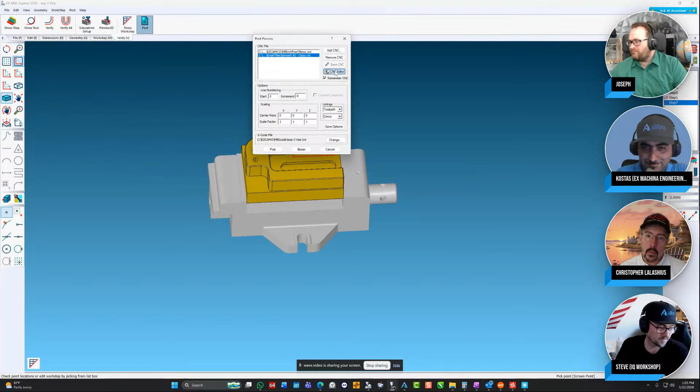So I have a post processor here. It was a Tormach, and I'm gonna just show you the CNC editor. It takes me directly to the Tormach post processor. And in here, we have the program start, and this is legacy format. So we have Visual Basic that's just overpowered this. I mean, you can do just about anything with a post processor, to your heart's content.

Here, we're not seeing a Z issue, but if I go to the tool change format, you can see that we have a positive Z. This M998 is the tool retract. So we're taking that extra 50 thousandths. If I go to the end of the program, that'll be the other location, we're doing the same thing here. Now, had you not known anything about post processors, the AI is there for you, where you can just go in here.

There's an upload button, so we'll upload the post processor. There's our Tormach AI copy. And I'm going to say to it: modify the post where M998 Z, what is it? I got to be exact here: 0.05, should change M998 to Z 0. Now let's see what AI does for us. Doesn't take it long at all.

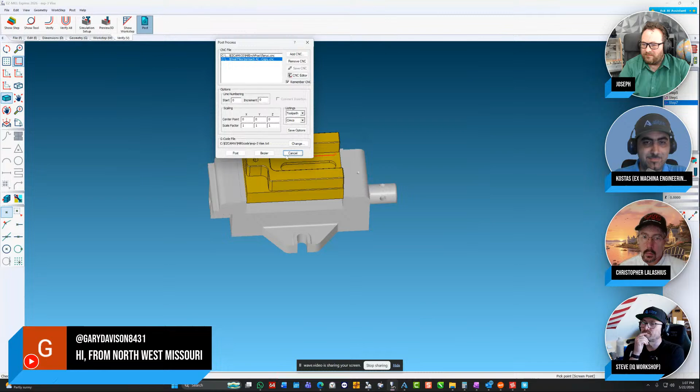But before I do that, I'm going to post the program. Let me just run that through. And post.

Info editor appears. Here's our program start. The M998 is okay, I'm going to go to find. Well, let's change that to... oh, we can go next. All right, so there's our Z 50 thousandths. We'll go next again. Those are through all the tool changes, and then we have our program end.

So now let's run the new post. So AI, you have to save and import to EZ-CAM. Now I'll run that same post processor.

Let's go find. M998. All right, so tool change Z0. So it made the modifications for us.

So anybody can really walk through this and ask AI what they want to change, and it takes care of it in less time than it would have taken me. So I've said this before, but...

Anyone who has, I mean, I've been working in CNC machine shops since like 2012 now, so I've got a bit of experience. Having a post processor that's not exactly correct was a nightmare, because sometimes everything worked in the post processor, but when you used a specific strategy with a specific set of motions and whatnot, it would post it in a non-optimal way.

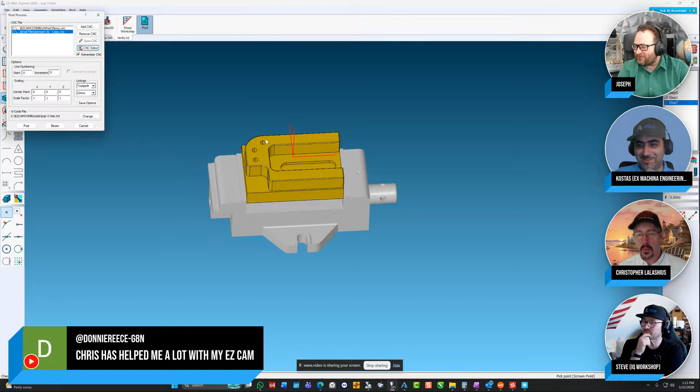Here's one: does EZ-CAM support the Carvera Air, and is Turn needed for the 4th axis, or can Mill Pro do that as well? The 4th axis is in EZ-Mill, which supports full 4 axis, so you can do wrapping. As the rotary table is indexing or rotating, we can move in X and Y. We even have it now where you can also work X, Y, and Z while you rotate the part, for 3D surfaces. I've got an example of that.

Maybe if I step into it real quick here. Let's see, Mill, open.

4th axis - so here's an interesting example. You put this on a 4th axis, and while this is spinning, it's going to be moving in X, Y, and Z.

Might take... okay, here we go. Let's simulate that.

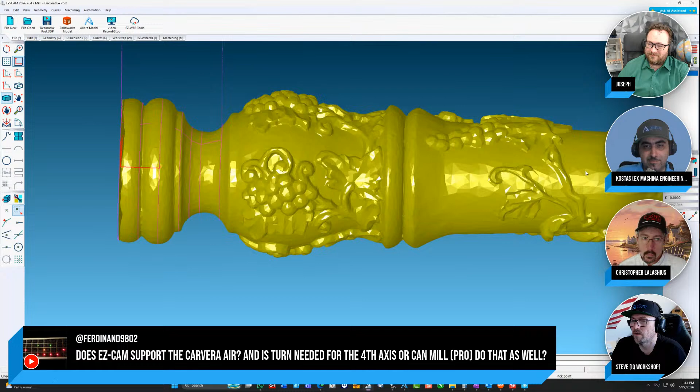I was trying to make a larger step over so we didn't have to wait through it so much. Let's see - curve step.

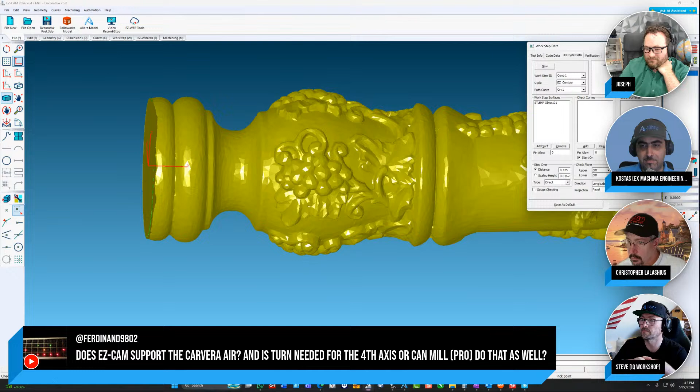Yeah, I keep getting an error, as it always happens with live, because nothing works right, of course. Doesn't it? Happens to me all the time.

Right, yeah. Why don't I come back to this? While you guys are talking about an Alibre question, I'll iron that out.

We'll nail that, absolutely. Something we've talked about with Alibre in the past is STEP and SAT files, and I don't know if I gave that the depth I should have. I think it's important to unpack why these are different formats and what a big difference it makes. When you have a model in your computer, no matter what parametric platform you're using, if you convert to STEP, there is a substantial change.

STEP says: I want to store all of the geometry or the shape of the file. Your computer, on the other hand - your Alibre or whatever platform you're using - actually represents these surfaces using something called NURBS, or analytical surfaces. NURBS surfaces, imagine, are point splines that you can make. In fact, I'll pull this up on my computer.

NURBS is a really fun word to say - kind of a funny word. But if we make a spline like this, I have all of these control points that determine the shape of the spline. Imagine those in 3 dimensions, and that is how organic geometry is represented. So your computer has a bunch of these in the background that you don't see, representing these surfaces.

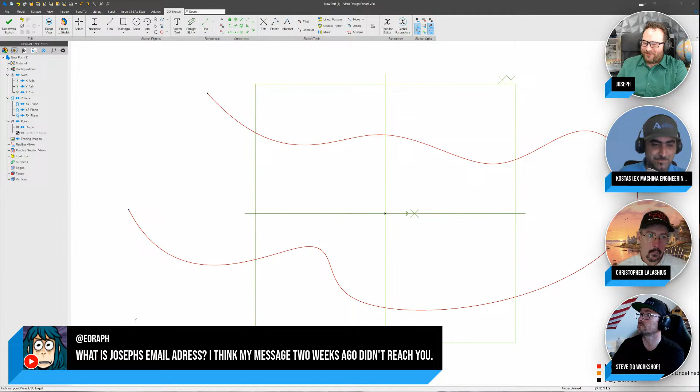Okay, can I just add a couple of things? First of all, I want to highlight this because it's a really quick answer. The answer is yes, it does - I've used it. The question was does EZ-CAM have adaptive roughing and finishing, and adaptive roughing, because that's only used for roughing. But yeah, it does have adaptive roughing. I just wanted to add to that.

So NURBS - it's not a slur for somebody who's just started playing the video game you love, right? It actually is initials for non-uniform rational B-splines. I think I got it.

Yep, and they were developed by Renault in France, right? And they're called Bezier curves because the actual mathematician that defined them mathematically for the first time was called, his last name was Bezier - I think it was Pierre Bezier or something. But the really funny thing is, Renault invented this thing, and the first car they designed using NURBS was the Renault 19. Now go on Google and find a picture of that car - it's a square box. So I don't know why they went into all that trouble. A square box with invented NURB fillets... curves. But yes, it does have a couple of fillets. That's very true, especially the 16 valve one, which is quite an exciting car to drive, but it's still a square box. So they went to all that trouble to design a slightly less square box. There you go, fun fact for you.

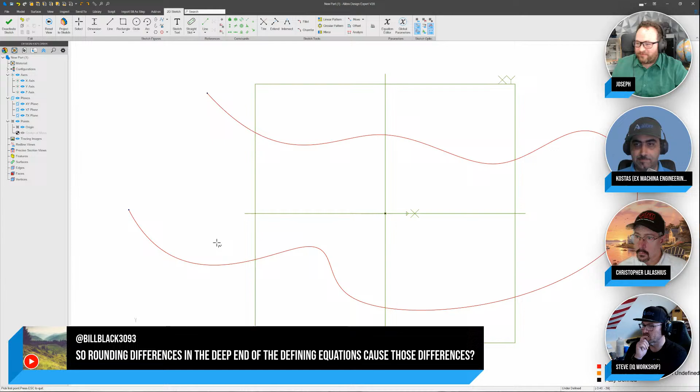That is one thing, yes absolutely. When you're dealing with NURBS, different kernels are going to define splines differently, so you can have the same geometry represented with very different looking splines depending on how the given computational kernel processes that. What these kernels do - we think of them as geometry kernels, but their geometry is almost secondary when you think they are defining topology, maintaining consistency across different nodes, constraint graphs, geometric computations - all of it happens before the geometry, so it's almost secondary. There's a lot that can cause these errors. Another thing is when you go into surfacing, you have a patchwork of different individual faces being knitted together, so small rounding differences compound across these different relationships sometimes. That's a big factor as well. Hopefully that's kind of an answer, and a lot of it depends on the specific case and situation.

Yep, and look, NURBS is a really weird thing in mathematics. If you go into the math definition of it, it's a function - for every point, if I remember correctly, the tangent to the curve at every point is defined by three control points: the one you're closest to, the previous one, and the next one. There's a mathematical definition there, so it is a bit weird. And I imagine that different geometric kernels have different commands and entire algorithms and strategies to decipher that and actually design the curve, so it's also a porting issue. When you want to take one set of commands that maybe ACIS uses and port it over to do the same thing with a different command set that Parasolid uses, that's another issue for translation problems.

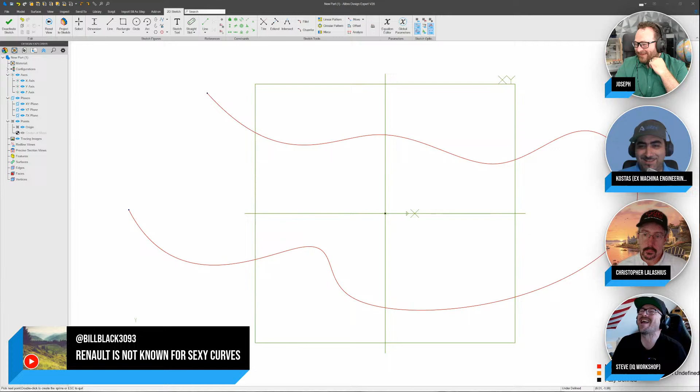Love it, yep, I like that too. I think this one might be for you, Costas. Yeah, well, they're not known for sexy curves - they're known for being sexy around the curves because, come on, they're great cars, really fun cars to drive. And the good thing with Renaults when you drive them is you don't have to look at them on the outside, which is a major plus.

And we have another question. Oh, math is fun, got to throw that one in. It is, math is fun. Yep.

All right, this one is kind of after my own heart. Does EZ-CAM run AI locally or through an EZ-CAM server? It goes through the server. Perfect.

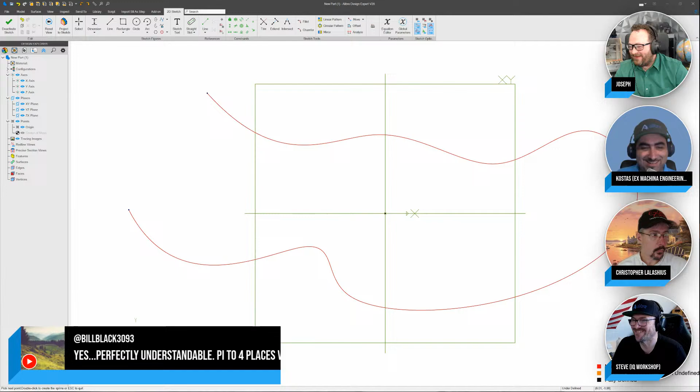Oh, we got a reply from Costas again. Yeah, he keeps going, but he's correct about that, right? My absolute favorite Renault was the Clio, the first Clio 16 valve, and the Clio Williams - they were amazing cars to drive, like the benchmark, but they were ugly. Come on, let's be honest, ugly cars but great to drive. The question is though, Costas, do they have the Renaults that we know in the US? I don't think they do - this might just be a European thing. I don't think Renault is sold in the US, and I don't think they're sold at all these days, right? I'm pretty sure Citroen is out of the market as well - they had the large XMs with the hydropneumatic suspension system.

But yeah, that's a great one - if you ever get the chance to drive one of these things from the 80s, nothing, not even a Rolls Royce or a Bentley from 2026, rides like that car from the 80s. So if you get a chance to drive them, do so. But I don't think they're in the market in the US anymore - it's a European thing. Was that the Citroen CX? No, the XM, the larger one. The CX and XM had the same suspension system, and the last car to have that was the Citroen Xantia 2. But the XM, with its large wheelbase, was like a steamroller.

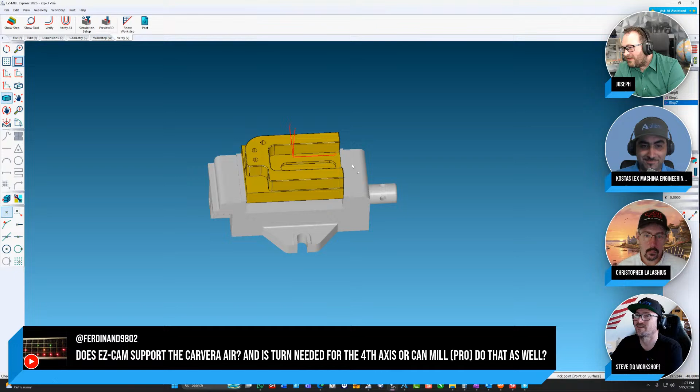Now I'll go to your screen, Chris. Sure. I saw back to that adaptive clearing question - it absolutely does do adaptive clearing. I don't know if you can show us maybe how to invoke adaptive clearing, what the benefits are, and why someone would care about that method.

All right, let me - finally found that question, I got a good example for us here. Okay, let's deactivate these and start fresh. So we're going to pick this face - this is what we're going to use for high-speed machining, the adaptive machining.

I'll use a quarter-inch tool for the step over, so we modify the feed rates, and also our return passes stay down at the bottom of the part so they're not rapiding - you're not getting all these rapid moves coming over to the next move. We just skim the bottom enough so you're not going to have chips go underneath the end mill.

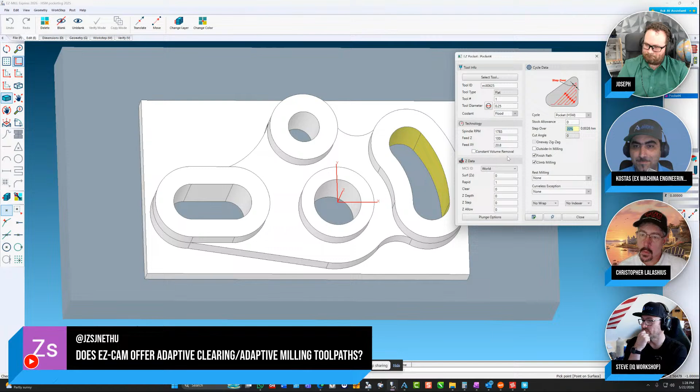Exactly. Verify that. Now, if you noticed, I only clicked one face, and EZ-CAM automatically knew where the bosses were, so it adjusted for you. We start our toolpath outside of the stock.

Let's bring that up again. So EZ-CAM will start its machining from the outside, work its way in, using arc segments to come into the corners. I'm going to use an oversized tool - let's make this 625. Verify again. Okay, so we're starting in, we're stopping where the tool can't fit.

Okay, so what we'll do with that is we'll go back in and make another operation, change our tool, change the size of our cutter, go into rest milling - that was pocket 4. You can adjust the step over here, you can adjust your plunge options - everything you could do in the first operation, you can do in the second. That's something we've just added, I think it's new in version 2026. So we'll verify.

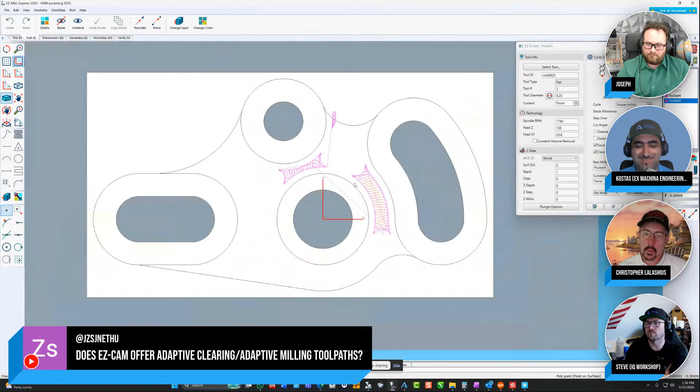The EZ-CAM gives us a nice lead starting out where the material had been removed. Combine it all together.

And preview. Okay, so the change in color is a change in tool number. And this is showing us where the other tool left off, and we did our remachining with high-speed machining.

Can I just add that the reason you want to rough with what's become known in the industry as adaptive milling is you get a very stable chip load. Every time the end mill takes a cut, it cuts the exact same thing. That keeps the vibration steady and reduces resonance, where you might get a vibration that resonates with your entire system and flexes the end mill, creating lines on the part.

And most importantly, when your end mill resonates, it moves a little bit more than it normally does, so it wears out a lot quicker. Surface finish isn't that important when you're roughing because you'll finish it anyway, but end mill lifetime is definitely important. That's the expensive part in all of this process - the end mill. If you can make it last twice as long, which is not uncommon for adaptive roughing compared to roughing with straight lines, that's a big win.

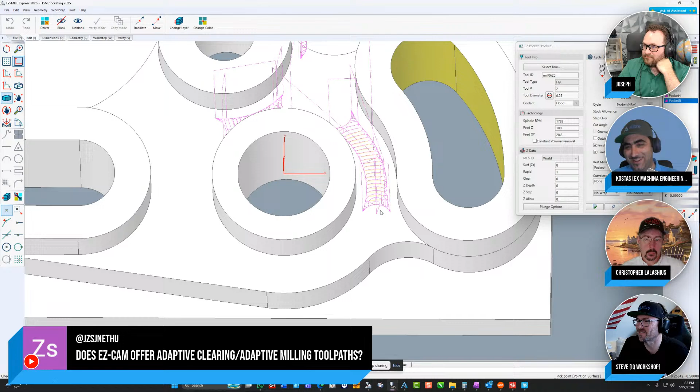You can see here - I just want to point out, when I was saying it would start off the rough material so you're not going to damage your cutter, it actually has a lead in, and this is on the roughing. The outside tool path - that was on the rest machining, right? Yes, and here we're starting on the outside and working our way inward.

So we're not damaging the cutter at all, and that's true with our 3D roughing too. It's just impressive where it realizes material's been removed when it's going down for the next cut. That's important, man, because you can definitely helix into a part and start clearing it out - it's a valid strategy, especially for an enclosed pocket, that's the only way to do it. But it takes a bit more out of your end mill, and if you don't have to do it, why do it? And if you need to spend 15 minutes fumbling with options and settings just to get it to start in the correct spot, it becomes quite annoying quite quickly.

What I'm going to do - I just want to post this and show you that we're adjusting the feed rates as well.

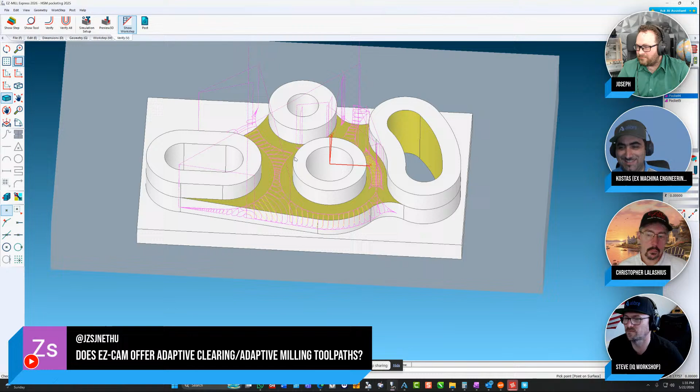Can I say something else about that? That's a feature SolidCAM heavily markets, and charges quite a bit of money for as well. I think the variable feed rate in the final CNC program - they charge more for that feature than the entire EZ-CAM license, just for that one option. And you have EZ-CAM doing it out of the box, which is nice.

And it's not just the time saved - for somebody who hasn't used adaptive roughing strategies, it's a revelation when you do. You're used to getting like 10 or 12 parts out of an end mill, and suddenly you're getting 30 parts out of an end mill. That's real money right there.

So adaptive roughing or adaptive tool paths are essentially more gentle on the tool. From what you're saying, is there any other advantage to it?

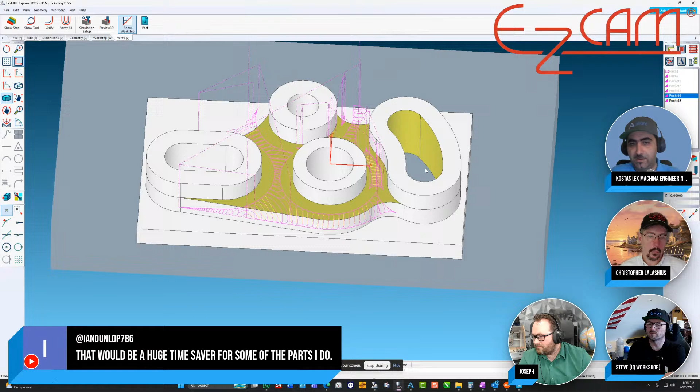That's real money, guys. That is real money right there. Carbide has spiked in price the last couple of months, so saving tool life is important. It's even more important now. Yeah, you reduce a lot of heat. Exactly, an awful lot of heat.

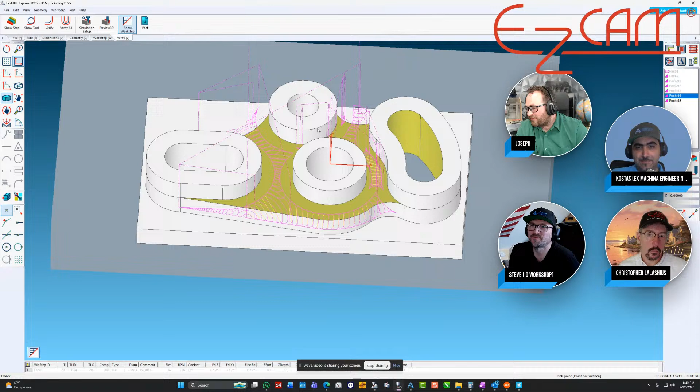And also another one for you, Chris: Can I start with EZ-MILL Express and upgrade to EZ-MILL later if I need more advanced features?

Absolutely, absolutely. So you want to be within your 1 year support and maintenance on that, because if you let it lapse, then to upgrade to the next level you just have to keep in mind that you have to purchase your maintenance to keep current. And so you pay the difference within the year. If you skip a couple years, the maintenance goes up a couple hundred dollars. It's not like you have to buy the whole seat, the whole maintenance from the first year, second year, and so on. That seems to be a trend going on out there. It gets pretty expensive to keep up.

Oh man, I have a pet peeve about that, right? Yeah Steve, he's heard this before. It's like Kostas, you keep saying the same story. First time I heard about that, I was working at a machine shop, and I was talking to the rep for - I'm not going to say the name of the CAM system - and I'm like, ha, nice joke, cool, but really, what's the price? And he was like, no man, that's the quote. I'm like, okay, but I don't want to buy the system again, I just want maintenance for this year. And he goes, yeah, but you need to buy the 4 years that you missed. I'm like, oh no, man, you just lost.

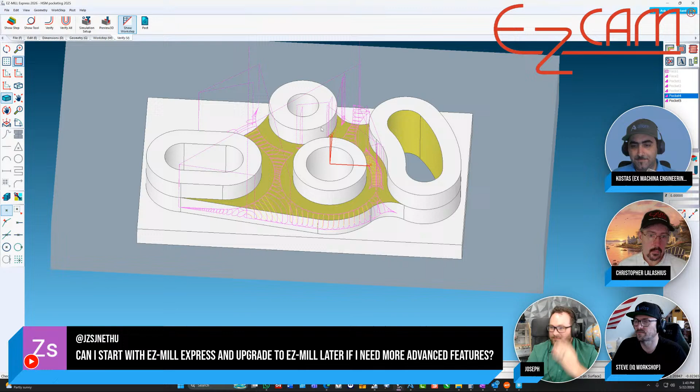I'm going to have a little laugh because I came across this question: can you do a chamfer along a 3D line? I immediately thought, I've already got this perfect spline I just sketched for a last question. So I switched to my screen and hurried to make something with a 3D profile. I said, let's do a chamfer along a 3D path - then I bet they're asking Chris that question and not me. I was wondering about that.

But yeah, we do have an example of that - let me call that up. So in Alibre, you absolutely can do a chamfer along a 3D line. I'm so glad to be as helpful as I was. By the way guys, this is a very famous part - for those who don't know what it is, it's a very famous part. This is a 3D area here where it's coming down.

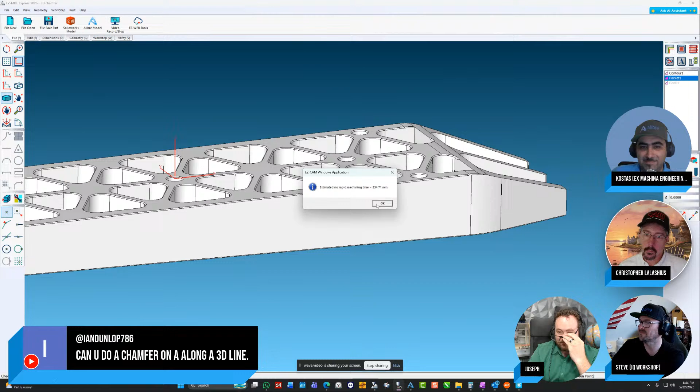Let's deactivate that. I'll put these into motion, get a preview. So I'm just working with this half. Now we're going to go into contour. Set up my tool - I do have the ability to bring in a tool library. Right now I have a blank one; I was bringing in some other tools from another vendor, I think Kennametal's one of them. So you can import tools. I have a flat end mill - let's put in 45 degrees. Now I select my surfaces, 3D section, and verify. Preview. There you go.

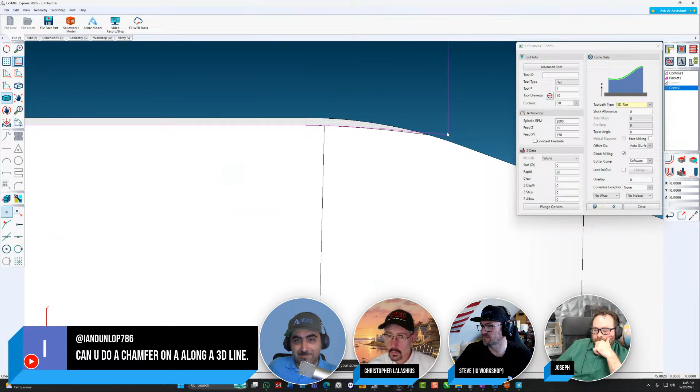So yeah, we can put that around. Let's go with 3D slot here - I think is what I need. We'll do a side view. You can see it's coming into a 3D cut right there.

Now Chris, this is also great for deburring parts - I just wanted to say, not just chamfers, but also for deburring parts on the machine. Super useful, that's a good point. What kind of machines do you need for chamfers on 3D paths? Can you do it with something 3-axis, 4-axis, 5-axis? It's something - as you know, an EZ-Trak, an E-mill has a powered Z. If you have a powered Z, you can do it. If you're standing there with a quill, of course, 2-axis, you're not going to be able to do that. But anything with a powered Z can take care of that for you.

What's the best tooling for that? Would it be more of a ball end, or some people use? You can use a ball end, you can use a bull, some people use a spot drill. That's very common - you just grab a carbide spot drill, what have you, and run it over it, especially for deburring, I did that. Here I have a 45-degree chamfer tool that I use, but you can always switch that over to a spot drill - change this to a 90-degree tip angle. Wow, lots of good options. Yeah, oh, the diameter is wrong. Yeah, okay. Let's see.

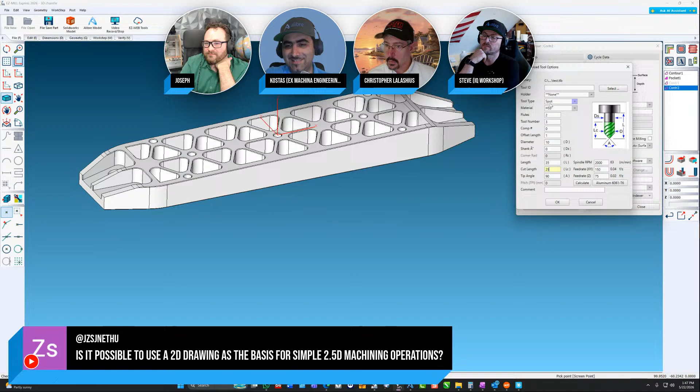Spot drill. Diameter. There we go.

I like this question. Is it possible to use a 2D drawing as the basis for a simple 2.5 machining operation? 2D geometry only, like a DXF, I'm guessing. Yeah, a lot of the guys with plasma cutters and lasers, that's a real go-to. But you want to work with a solid model in most cases.

By Alibre, exactly. Alibre Atom, guys. It's a... but I don't know. Do you have a, Chris? Do you get a discount for Alibre Atom when you buy EZ-CAM? How does that work, do you bundle it?

We're a bit different, you guys bundle yours together, and what we do is Alibre, when you buy, there's a machining option for Alibre, and you get EZ-CAM and Alibre Atom with it. But seriously, Alibre Atom is like a $200 purchase, and they often do discounts. It's perfect for a machine shop because most of the time, if you have a 3-axis or 4-axis mill, that mill cannot cut geometry that Alibre Atom cannot generate. So it's a perfect match, and you only pay like $200 for it, no need to pay $10,000 for SolidWorks.

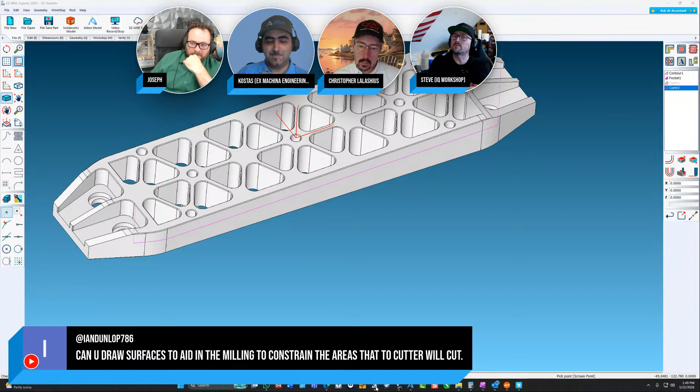Within EZ-MILL Pro, you can create surfaces, so you could extend, we could even cap. Let me show you. Let's see, nice part, cancel.

What is that, like a printing roller? Yeah, it's like a rolling pin, sort of. Let's see, cool, it'll patent taco shells. Don't go there, Steve. I was going to say, isn't it Taco Tuesday? It's always Taco Friday over here, Chris.

So in some cases you want to extend the surface. You might want some over-travel where the ball end mill isn't rolling over the edge but flowing through it. We use a curve for that. We'd just snap from one end to the other, maybe use edit and translate X negative, say, 1 inch.

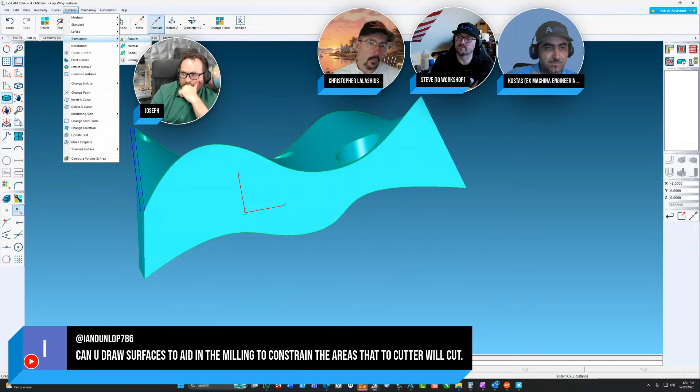Copy mode, select our curve, then go into surfaces and create a ruled surface, select your boundaries. So you can do quick things like that in EZ-CAM where you don't have to take it over to Alibre and modify the model or come up with some kind of extension. Even with holes, a lot of times people want to cap them just to smooth out the tool flow, and we can do that by going in and creating a face curve.

Surfaces, standard, from plane, arc, circular curve. I'm going to discriminate, when I click I only want to click on a curve. There you go. You can see that we've patched it and it looks like a perfect match. So yeah, you can do things like that. You can even use the geometry on the surface edges for chamfering.

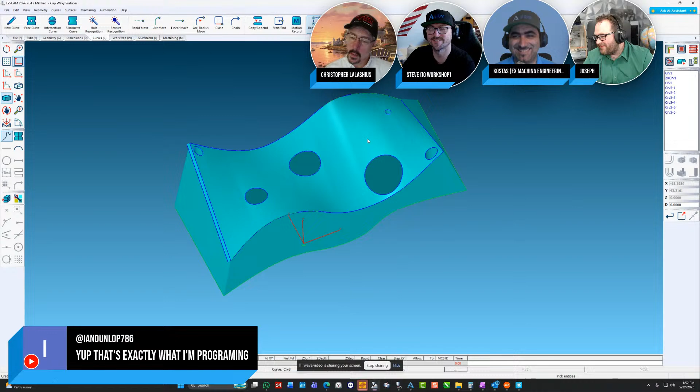So we've got a reply. Yep, that's exactly what I'm programming. So Chris, it looks like you hit the nail on the head there. Hey, once in a while we'll find bread. I think Bill Black noticed our top comment. Oh man, Steve, you shouldn't have. Come on, I'm getting hungry already.

So there's a really good question here, let me just throw this up on screen. Does the software support creating and using custom cutting tools? Yes, we do.

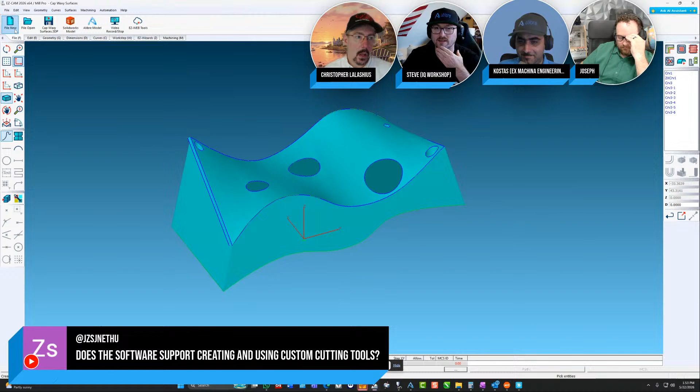Don't know how long it's going to take me to do this, I'll try to move through it pretty quick. Let's just say, let's make a contour. Bear with me, let's see, do I have one open? I do have one open. Okay, so Mill Pro now requires the Mill and the Mill Pro in order to make custom tools.

Now what I need to do is open EZ-CAM's library. Let's go on the C drive, EZ-CAM W, and we are working in 33. Switch over to all files. Tool holder, let's go with, I think that's inch, so we'll go with tool holder inch. You can see all the different, oh those are tool holders, I want custom tools, sorry.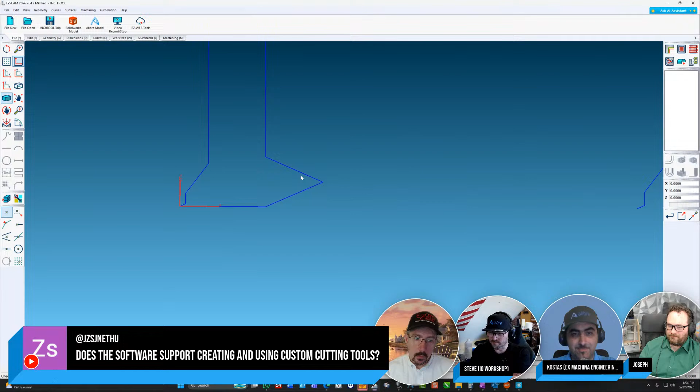There we go, here's one of our thread mills, single point thread mill. Here we have our center drill. So let's go down to the end of the pile, let's go with new curve. Before I do, I'm going to set up my grid spacing, let's do something like 1/8 of an inch.

Make a new curve, curve 14. Wait a minute, well, I want to rename that. We'll get back to that. Let's see, so linear grid. We'll just do something like that. And I'm not on zero, I want to move that up. Move from here, there. Okay, so that was curve 14.

There's a status bar down at the bottom, so that's the active curve. So I'm going to save my library.

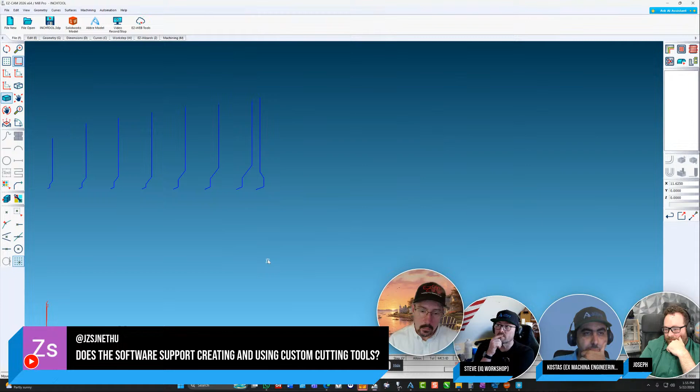Can you show us the status bar again? I'm just moving us out of the way here. Oh sure, okay, so down at the very bottom we're on layer 1. So if we're working with different Alibre models, for example, you might want to click on layer 1 and change that over to layer 2 and then bring in your Alibre file. So now you are stacking them up and you can work with layers. We have a layer manager that allows you to hide, delete, or make copies of them. It's all tucked away up here. I know I'm going into a different subject here, but man, it's just insane. You can hide them, you can show them, delete them, create other layers, add the models to the layers.

So, yeah, good organization. So now let's go into this one. I've got to go to my tool library. Library.

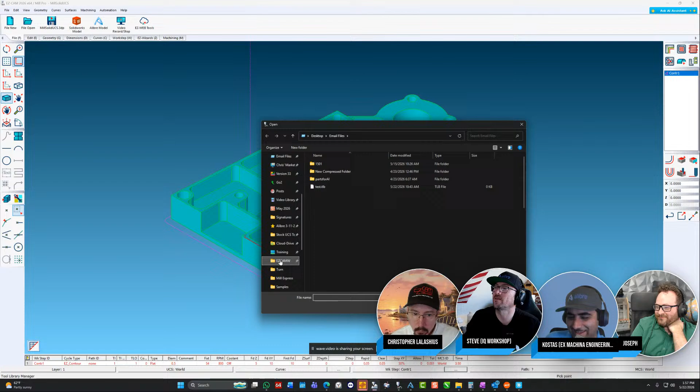All right, I'm going to create a new tool. That was CRV 14, I think. God, I wish I renamed it. I would have been able to. Let me just pop that back open. Yeah, CRV 14, okay, that's the key to it. You draw a curve representing your tool shape, you've got to make sure you name it accordingly. So let's go with a flat end mill, readable. That's where it's getting the custom form. Angle zero. Close, save.

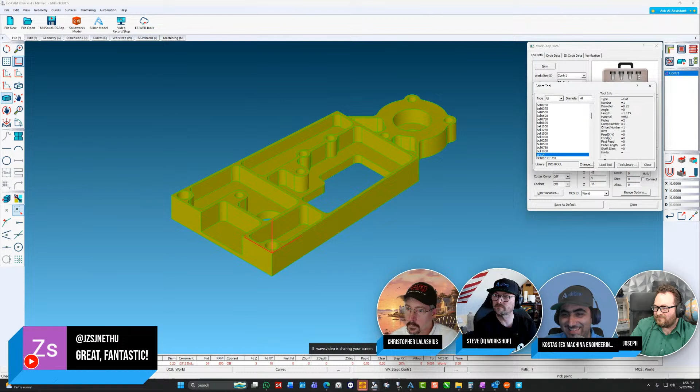Go in here. Background, select. Whoop. There you go, I hope it's not case sensitive. Let's see, simulation. Slow the simulation down. Turn off holders, the tool holder is huge. Yeah, the tool holder is huge, but the tool seems to work. Yeah.

I'm in, this is metric. I was wondering if that... well, that's not the case. Escape. Let's see, overall corner radius. Tool, all right, switch over to you.

I'll get this, once in a while you end up running into something. I'm rushing around, there's something silly I'm doing here.

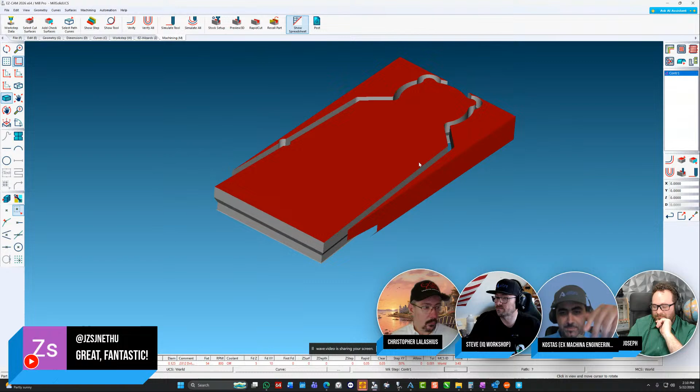When I had a job in a CNC machine shop, we used form tools for aluminum - it was a specific profile of a part with two ball bearings, basically a sliding door would ride on these things. You had to do a very specific profile and then put the ball bearings in, and it was just a form tool in a single pass. So whenever you have a profile that is repeating along a path and you have a large production quantity, you do a form tool.

No reason in playing with - it's funny, I just want to see what a Z helical will do with this type of tool. We've added the Z helical so it spirals down like a corkscrew. We've added that to the Mill Express. Let's just take a look at that toolpath. Yeah, that's cool, so let's make it a little steeper.

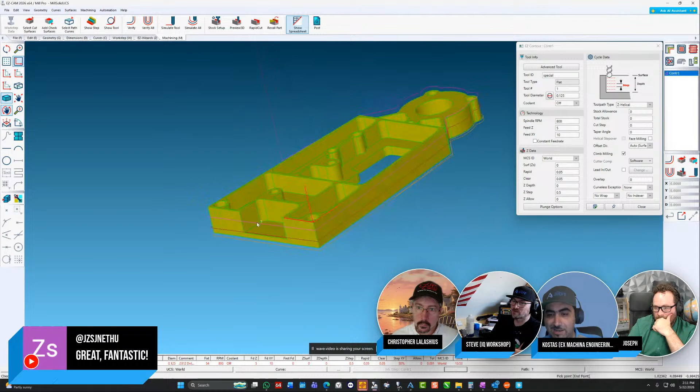Oh okay, I want to comment on that because I saw it when I was using EZ-CAM, and I really love that, I want to add something after you're done, Chris. Oh yeah, let's just see what that looks like. Isn't that awesome? Isn't that awesome? Let's just change that back.

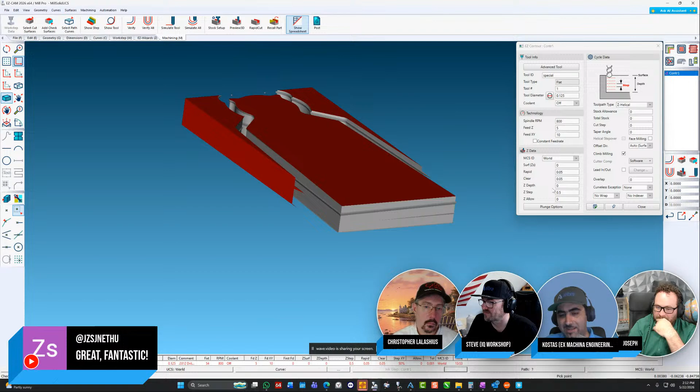I used to do the math in Excel and create that program manually for cutting key slots in very large shafts - like 120 mil, 5-inch, 6-inch, 8-inch shafts that you'd put large gears on, with a very large key seat. I used to do the math and do that, ramping down - I'd get an end mill slightly wider than half the key slot width, and it would cut the key seat a lot faster than just plunging in and trying to hog out the material.

But what I wanted to say is, when you're doing a helical entry for an adaptive, so you have an enclosed pocket like we were discussing earlier, you do need a helical entry for the adaptive roughing. EZ-CAM allows you to choose the taper angle of that helix as you go in, right? Which is a lot more important than people think. Do I remember that correctly, Chris? So I'm gonna put that into play here for you, yeah.

So the key to high-speed machining is you really want to go as deep as you can possibly go, and then step over. Maybe step over at 20%.

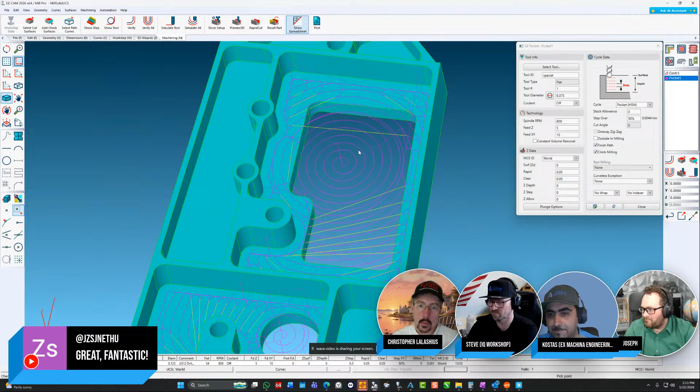So to do that, you can see here we're plunging straight down and getting to the bottom. What we do is add some plunge options. If your plunge options don't work, let's say you're using a helix and it's too large, or it's starting in a corner, EZ CAM will adjust and give you a zigzag down to depth. So you get some kind of plunge into the material rather than going straight down. EZ CAM adjusts for that automatically.

Before, it used to be plunge parameters aren't possible and you're done. You'd have to make the adjustments yourself, use a curve, redefine where your end mill is going to start. So EZ CAM automatically gives you that zigzag where you just can't fit a helix in there any longer.

That's cool, man, isn't it? That is so cool. You get to helix into your pocket with parameters that you select, and then you continue on with your adaptive. Exactly, yeah, that's cool.

I'm seeing noise, Joseph, your mic is pretty hot. Oh, is it? Let's see. What kind of noise is it? White noise, something like that. Yep, a booming noise, basically it was like the mic, it's noise floor. Is that any better? Yes, it's better, not gone completely, but it is better. Oh darn it, yeah, I think my computer is really doing something here.

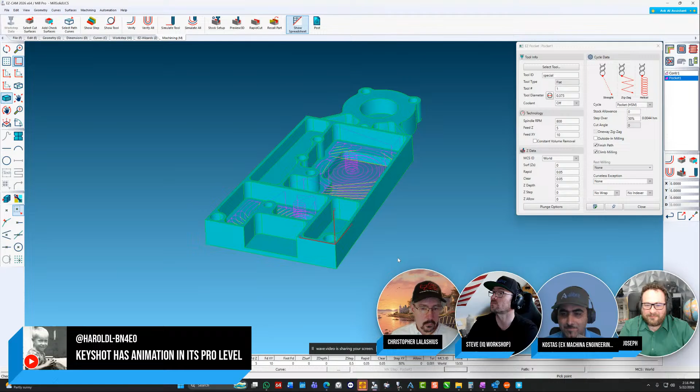I don't know if this is along the lines of what you might be looking for, but I did make my own animation inside of Alibre. You can crop out the UI and have somewhat of a real looking animation, dynamic springs and all that. I've got a video on how to do this, but essentially you can either make an assembly, turn it one frame at a time and take a screenshot, which is what I did here, or you can write a Python script, and I think there's probably one I can make available that would automate an animation like this as well.

So there are some things you can do inside of Alibre, and then there's free software as well. Blender is known for its animation and things like that. So there are options, but I think Harold really nailed it with the most straightforward answer. And a shout out to our forum legend Harold, who we love having join us all the time as well.

Can I just say, Glenn Lipman, man after my own heart, I also do mechatronic design. Basically, that's my niche as well. So yeah, that's what I wanted to say.

Maybe you have a robotic simulation program like I've been using for years, Coppelia Robotics, and what I've been doing there in the simulation, it's not photorealistic, but you can get a lot of data out of your entire system, and you can add the Alibre model as an STL. Then the rest of your robot or machine can be just a free body diagram, blocks interacting. But you can see in your simulation screen the STL from Alibre, and you can get amazing telemetry from the software. So if photorealistic is not a very hard spec, that's another way to do it.

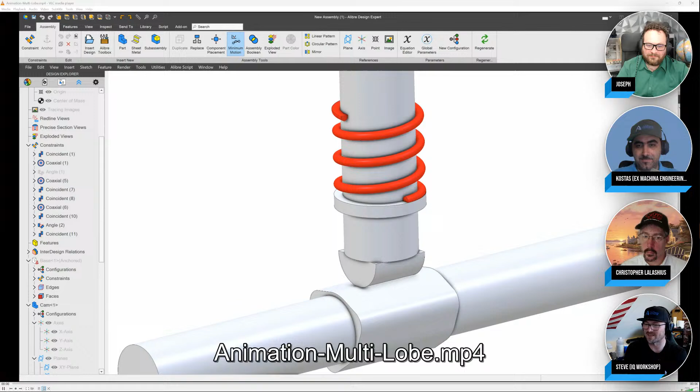However, Blender is pretty up there right now, and there's nothing missing out of it. People have actually made entire animated movies with Blender. It even has a video editor built in. Not a lot of people know that Blender was used for previs for one of the Spider-Man movies, I think Spider-Man 2. It's so powerful—fluid simulation, loads of things in there.

All right, so I'm seeing a few other interesting comments. I think there's one for Chris, actually one for you, Steve: chips and queso first, particularly for our British friends, since there's such a difference between temperature profiles of Mexican and British foods.

So Brits, we do like our spice, right? You've heard of the East India Company. So yeah, British cuisine, curry on everything. I think we invented fusion cuisine, because other than a roast dinner, I don't think there's much that's our own. Well, this company invented a lot more, like stock trading and a few other unsavory practices. But we can take our spice in the UK.

No one ever says, 'Gee, this meat pie is spicy.' Is that true, Steve? Are they pretty bland, or do you get a spicy one? Well, it depends on who made it. I do have family in London, and I try to visit when I can, and I can tell you, you can get any type of food you want, perfectly made—Greek cuisine, Persian, Indian. You can get anything. Let's be honest, you've seen Sweeney Todd, right? It's got cats in it, Steve. Just watch what's in your meat pie.

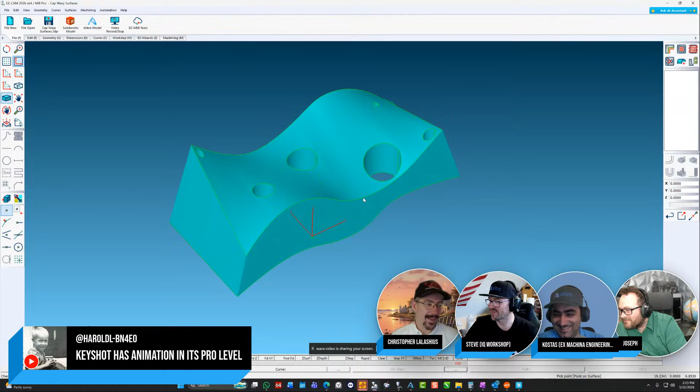So on a surface with holes like the one shown previously, is there any way to avoid holes during machining? As in other CAM software, Bobcad has this feature. Oh excellent, glad you asked—let me just set this up here.

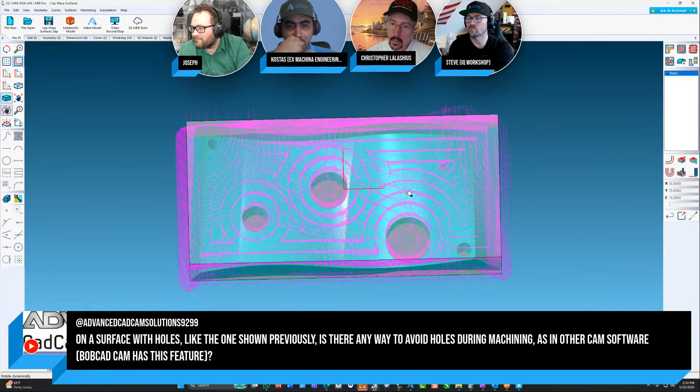We'll put our coordinate system in the center with some stock. If I go in and add—let's go with roughing and pocketing, flat end mill. Let's make it 6, see if it'll drop in the holes. I don't know the diameter right off the top of my head. Ignore region size—maybe I should get a dimension on that, but let's say we ignore regions up to 1 inch. And verify. Down in the lower left, we're showing our calculations going through. There it is—see, we're skipping over all the holes in that size. So let's change that.

Should start falling into... see, you can see here it's dropping down. But you can ignore regions. So like if you had a slot, you didn't want the tool dropping into a slot, what you'll do is define the length of the slot if it's longer than the width, or whatever. So you want to give it the largest dimension to skip the feature. Perfect.

I saw that as well. But yeah, Fusion licensing, Fusion licensing. It was really horrible when they started changing the model, and they seemingly randomly started putting tools behind a second paywall. I mean, just make the subscription more expensive and be done with it. Why do you need to do that? It was a bad move.

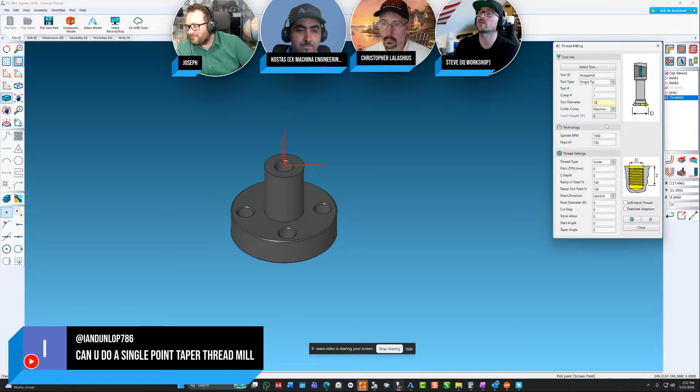Console. All right, looks like we're back. Recovered, we're back, almost there in my console. If you can hear us guys, let us know. Back. There we go, okay, let's take that one from the beginning, guys.

Yeah, okay, sorry, so we'll go into a thread mill. This is 36 in diameter, that's the major diameter, this is going to be an outside thread. Put a pitch, let's go with 2.5 for the pitch. The depth, let's go with, say, 50. Feed, you have a machine direction, you can feed from the bottom up or from the top down. Root diameter, we'll say 33 millimeters. Let's see what that gives us.

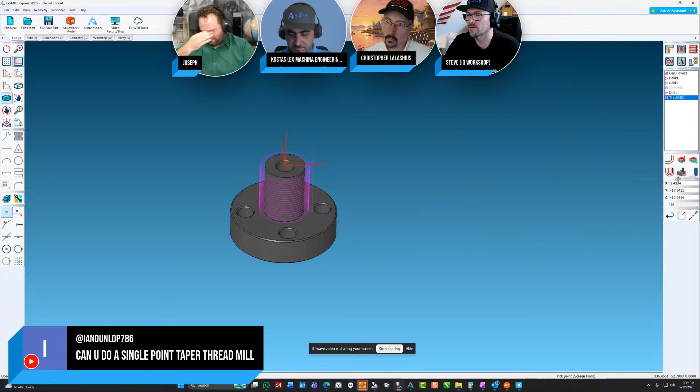No machining path specified, so you go in here, you select your cut surface. It's highlighted. There's our thread. Let's see what that looks like in real life here. Let's verify all.

Need my library, I have to go to... And sometimes if you don't install the software as administrator, you're going to run into an issue where it won't find the library. So you might want to reinstall the software as administrator, give the user administrative rights. You can take the rights away from the user after you've installed the software. Let's go ahead.

12. Thread mill. Pitch, 5. 33, depth. Preview. Wants to use my custom form tool.

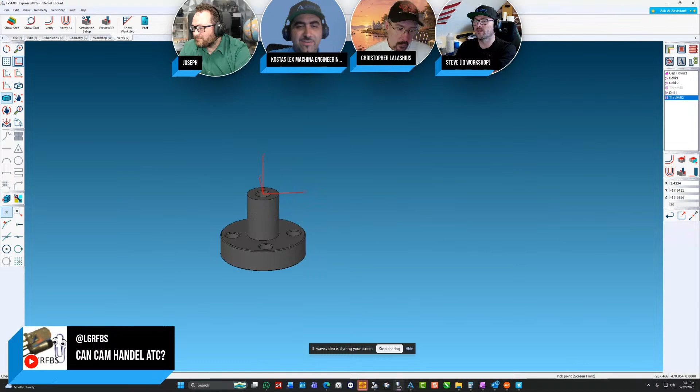Okay, so without a tool changer, typically what happens is the machine comes to a stop when it sees the difference in tool numbers. With an automatic tool changer, it just sees the tool number and does the tool change for you. One step further, if your machine supports it, you can have a next tool call, so not only does it go ahead, raise up, index, give you the tool, it'll sit there for the next - EZCAM will give it the prompt to do the next tool change without the M6. The M6 does the tool change. So if I'm on tool 1, it'll take the tool, then before it goes down, there's a next tool call, just T2. It'll automatically index the tool into the carousel, ready for when the tool has to return.

So yeah, fully supported. Just changing the tool number is all it takes. The next tool has to be added into the post. So if you're listening and you don't have the next tool set up, you can ask AI. AI takes care of that.

JSZ asks if it's in metric or in inches. From what I saw, both. Is that correct, Chris? Yeah, I've been working in both units.

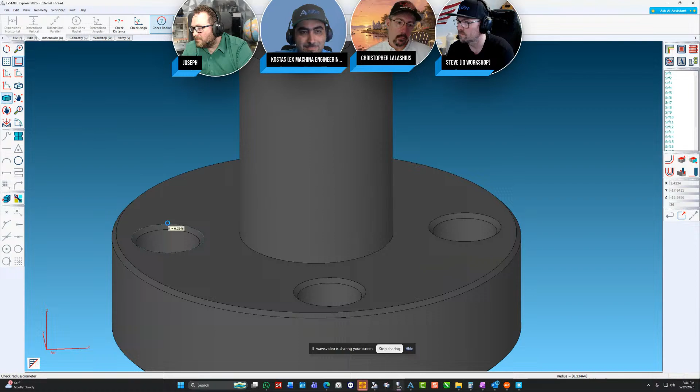Now my model, if I was to measure a hole, 0.3346. So now it's in inches. Simple as that. Matter of fact, if you asked AI that same exact question, how do I switch from inch to metric, metric to inch, it'll give you the whole explanation. It'll all be there for you.

That's so cool. Just on the AI piece, as a new user, if I came into the application and brought my model in, and there's a particular operation I want to do, can the AI educate me on how to do that properly? You know, I've been dying and chomping at the bit to show you this, guys.

I'm going to bring it in. I'm glad I asked. That's why the newbie is on the panel, right, to ask the silly questions. Yeah, the newbie. Steve is not a newbie, guys, but yeah, let's go. Let me just shut this down. It takes 3 minutes to do it, but it's worth showing you, and we'll just find some content, some topics to talk about while we're waiting for it to process. But let's go in here.

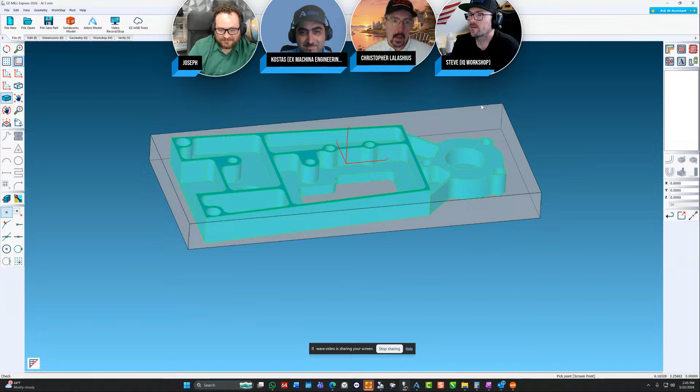AI. So yeah, you know nothing about programming in EZCAM, and you want EZCAM to make this model for you, give you all the toolpaths. You can adjust the toolpath once it's made. Just go into the assistant. Takes a second to load. Not 3 minutes though.

All right, so let's just say 'machine this part.' Oh, that's cool. So not only will it actually create a tutorial for you and walk you through step by step if you want to learn that way, but we've taken it one step further and give you the tool paths right inside of EZCAM.

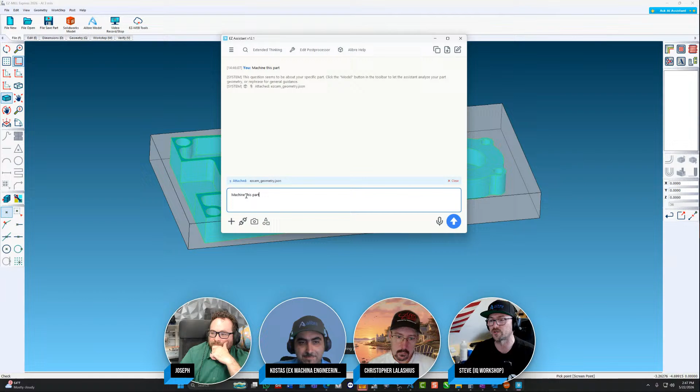I love that. AI is a very polarizing topic, and this actually gives you the best of both worlds. If you came in and don't really care too much to learn about things, you can ask it and it will program the toolpaths for you. Or if you want to increase your knowledge and skill, you can ask it to give you a tutorial and learn which toolpaths you're choosing and why you might choose them, and in what order and why. That sounds really cool, I like that.

Here we go, there's one feature in inventory. So we'll let this cook for a minute and come back to it. This is interesting, actually, pretty cool. Well, if you want, we can watch it, but yeah.

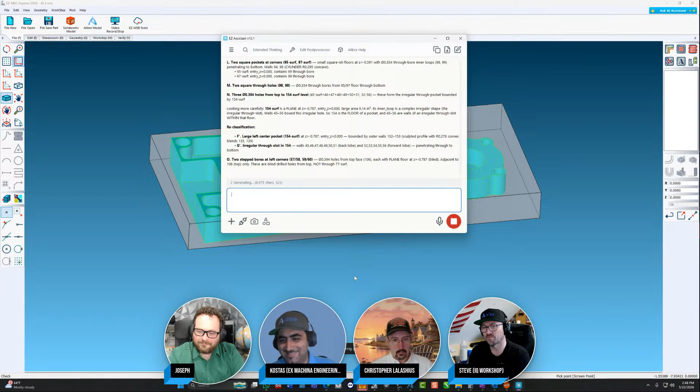So Kostas, you were saying before, I think it was before the stream, that you'd been using EZCAM, and there's some new things you'd like to learn. It looks like if you use the AI agent, it's going to educate you. I did use the AI a little bit. I fully own the fact that I am a bit swamped with work for about 10 more days, because I need to be delivering projects in 10 days from now. But then I really need to get into EZCAM a bit more, because it's so powerful.

I just love the fact that it has features that Fusion is charging more per yearly subscription than the entire perpetual license of EZCAM. I just love that. I just love it when you can slap it in the face of a huge corporation like that. God, it's just me. Sorry guys, I'm being annoying, I know, but sorry.

Well, while that's churning through, there's a question here for Chris around the EZCAM system for a post-processor 3x mill. This is a user from Brazil.

Compatible with various CNC controllers - Fanuc, Fagor, Heidenhain, and Mitsubishi. I'm not even going to pronounce those because I will butcher most of them.

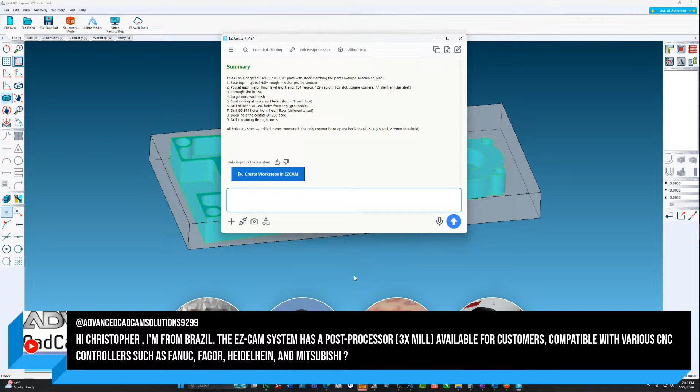I would get the last one, but no, we have post processors. All of those are popular machines, they're already in our inventory. You just contact us, or you even have the power of uploading an empty post processor and say, create one for Fagor, for Heidenhain, what have you. We do have those machine controls in the library. So yeah, you're supported. Contact us.

Awesome. And Heidenhain is an important one because it's not ISO compatible G code. It's got an entire language by itself. So Heidenhain controls are amazing in their capabilities and their precision because Heidenhain usually does glass scales as standard.

There you go, TNC 530. And what was the other one mentioned? Mitsubishi. So yeah, Heidenhain is an amazing control, huge capabilities, but by not being standard ISO G code, you're heavily reliant on the post processor to get the full capabilities of it.

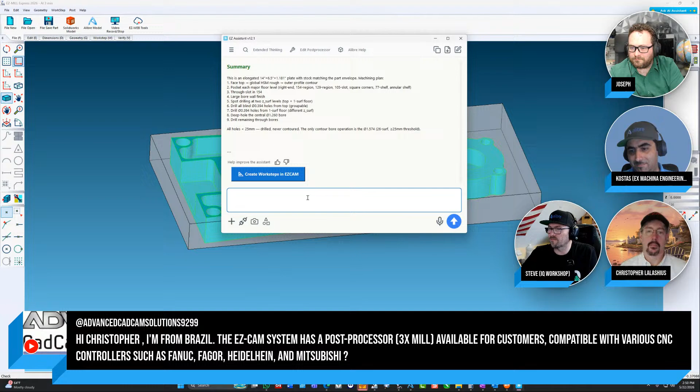And I see that button there, create work steps in EZCAM, and that was processed a while back. So time wise, we're killing it. So anyway, we just hit the create work steps. Just building them. Wow. That might take a little while too.

I might have lost audio on you. No, I think we might have an audio interruption that Kostas is managing. Oh, there you go. Am I back? Yep, okay, so... Oh come on, sorry guys, I think I just mixed things up a bit.

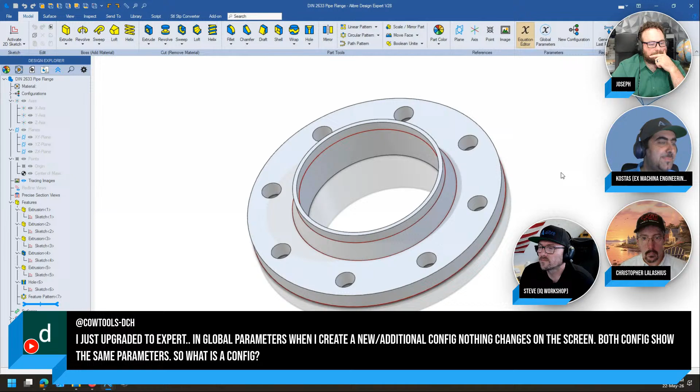So when I save this now and I update the design, when I go back into my equation editor inside the part, you will see that I have my pipe OD just came in. Oh wait, it's not that, isn't it? Global parameters, oh man, live issues. I didn't link the global parameter file.

So now I need to browse for the existing file, and there it is. And now I should have the global parameters in, right? I have a name conflict. It doesn't matter, this is just an example. So when you go over there and you open that file...

You can see that we've got configurations here. So configurations are available in the global parameters files as well. And when you make a new configuration, now config 2 is active and config 1 is inactive, and I can switch between them. The whole deal is that, let's say that I want a smaller schedule pipe. So there you go, I switch between the configs.

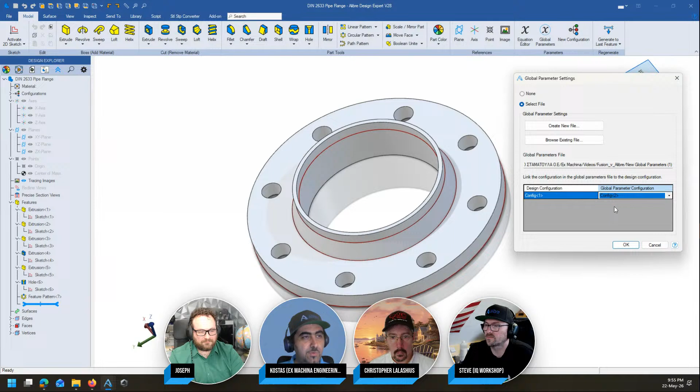Let's save this, let's update. So we're in here now, let's see our global parameters only - we're still at the original value. But if I go in my global parameters here, now I have a drop down here, so now I can control which configuration of global parameters is going to get pulled in. And now I've got my different value there, right? So that's how the configurations in global parameters work.

And if you're interested, you also have part configurations, which give you a lot more flexibility. The idea here is you click on the thing that you want to be variable between configurations. So if I click on feature suppression, now I can have some features suppressed in one configuration and active in the other one. If I click on parameter values, now I can have different parameter values for all of the features.

Color properties, whether to hide reference geometry or not, and all that. So that is a very quick overview of configurations. But remember that in global parameters configurations,

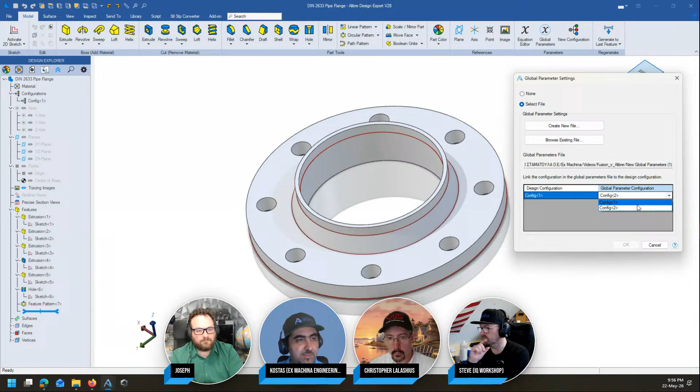You need to select it through here. You can have files linked to the same global parameter file, and those files can have different configurations selected, even though they are linked to the same global parameters file. So that's a bit more variability and options there. But you need to select it through here before you can see the values in your next configuration.

If it's only about one part, or even a couple of parts, consider top-down design, where you reference one design to drive the other one. Make full use of part configurations before you dive into the global parameters configurations. That's my way of thinking about it, and I hope it helped. If I didn't answer it, please let me know, and I'll do one more.

Love that demonstration, Kostas, for doing that on the fly, man. That was like a rehearsed video. Very nice work, a live curse hit me, but there you go. I'm going to switch to mine here.

I'm seeing a really good question. I've Alibre Design Professional. Last week I asked about how to save a 2D drawing as a DXF. In my export options, I do not have the option to export to DXF. The export options that I have are STEP, STL, IGES, SAT, Parasolid, JT, ZPR, and OBJ.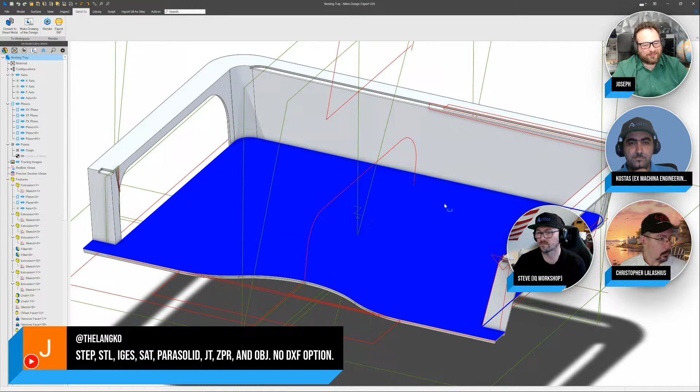So I pulled up a 3D model here that perhaps I'd like to make a DXF out of. Move you over here, Steve. When I go to export this, indeed, move over, Steve. Sorry for that. We're only seeing 3D formats, and that's because I'm in the 3D modeling interface.

So what I can do is make a drawing of this design, and this is where we can really go into the 2D environment here. So as I send this over to the 2D environment, I'll move my window over.

From the 2D drawing environment, now we're looking at what would represent much more something like DXF. We can say File, Export, and that is where our DWG and DXF and PDF options are for export. So let me know if that answers your question. Simply send to a 2D drawing first, and you should be able to see that showing up.

I just want to add to that, sometimes the nomenclature gets a bit conflated and confused, especially if you're just coming into parametric CAD.

If you want to save a 2D sketch that you made in the 3D environment into DXF, you need an intermediate step. You save it as an SVG, and then I highly suggest you download Inkscape, which is open source, free, and hugely powerful. That software can open an SVG and immediately resave it as a DXF. So that's the workflow, if you want to take a 2D sketch from your 3D environment directly into a DXF without making a drawing of the entire part.

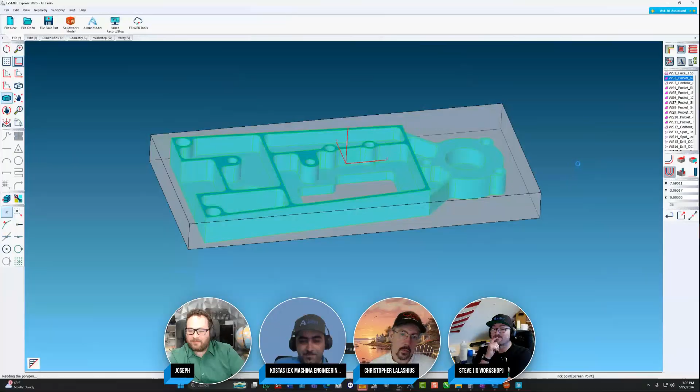So would it be fair to say that with any toolpaths generated by AI, generally speaking, it's worthwhile simulating them to ensure something doesn't go a bit weird, and then you drive a really expensive bit through really expensive material in a place it's not supposed to go. Is that fair to say, Chris?

We have tools to help you with that. So do I trust AI? How do I know I'm not going to have a problem with what I put out at the machine?

You could go to the simulation setup, and we have what's called create uncut solids. So if I execute that, anything green has been cut to size, so you're going to cut most of this part to size. The remainder has to be, the red is stock, yellow would be a gouge. If I messed up, I would have to correct that.

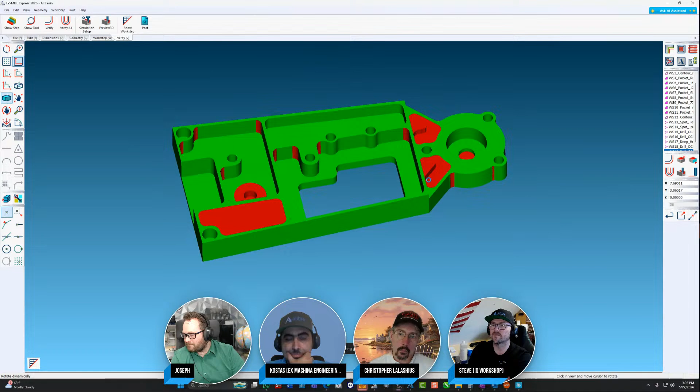And to find out which operation did what, you just double click on it and it pulls up the operation. I love that, I like the visual breakdown, because at a glance you can see problems right out of the gates. You just double click on the problem and it pulls up the operation that, I mean, come on. You're absolutely correct, that's huge.

So you just step it through, take baby steps. You can just go in and deactivate, look, just deactivate, and still that was... oh cool, that's the facing. Yeah, sure. Then you just activate them. It's cool because that was relatively quick. I mean, if you're programming step by step yourself, if you were really proficient, you might do it in about the same time.

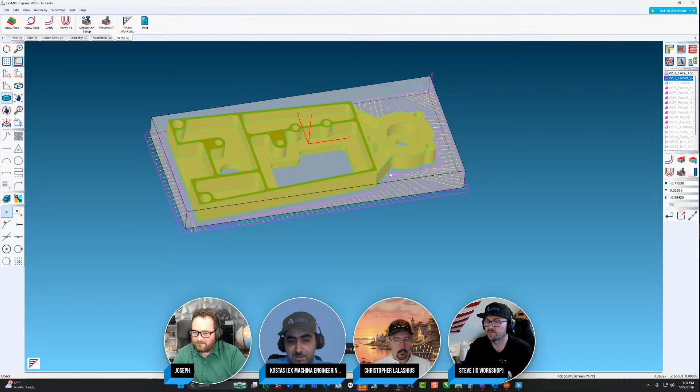You wouldn't be that much faster on your own. And to give you something like that in that amount of time, and then you just need to correct a couple of simulations and strategies, that might be completely worth it as a workflow. I'm really impressed by how close it got, like first time out.

Bill Black is putting the heat on. Buy a seat, get a cap, plus a taco in the mail. Ghost pepper, ghost pepper, ghost pepper, ghost pepper, there you go.

I want to get to this one. Do we have a release date for 29? Oh yeah, glad you asked. There's no promises because this is a very quality intensive process, we're not going to release something if we find any issues with it. So no promises, but maybe I won't make anyone upset if I say perhaps Wednesday. We'll see, no promises, but that's a pretty strong target. I think there's a thread in the forum that mentions it.

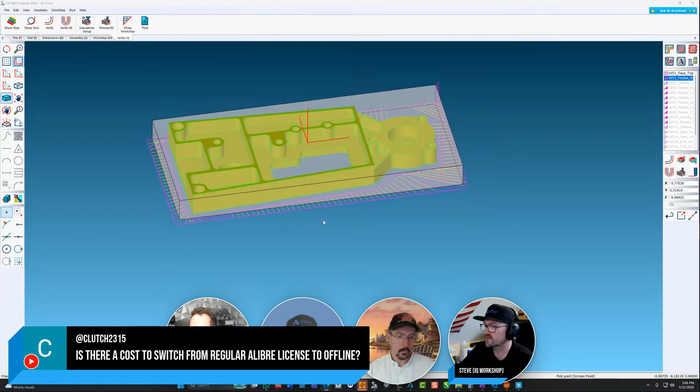Glad I helped on that one. Joseph, is there a cost to switch from regular Alibre license to offline? Yes, it's a one-time cost, a one-time $200 upgrade. Contact our sales guys because they can run circles around me with anything licensing.

One caveat is I think it's difficult or not designed to be switched around from machine to machine, so know that going in. I don't know the exact details around that, but yep. Regular Alibre licenses, it's either 14 or 30 days that it will do a quick ping to check if it's active, otherwise regular licenses are offline. Offline licenses specifically, I think, go a year, so you only need to connect once a year for things to work out. Okay, cool, worked out for Clutch, glad to know, thank you.

This is an important one: is there any plan for future versions of Alibre? I'll switch to this.

Design to open and edit STL files. Is there a demand for this? And there is a demand for this in reverse engineering, as I need to edit and correct meshes obtained from a 3D scanner. This is a big topic, and I'm glad you asked. So this is really high up on priorities, and I can say that there are now a pretty good proof of concept in Alibre, if that gives any indicator. So this is definitely not a topic being ignored. Stay tuned, because I think there's going to be some future updates on that very topic.

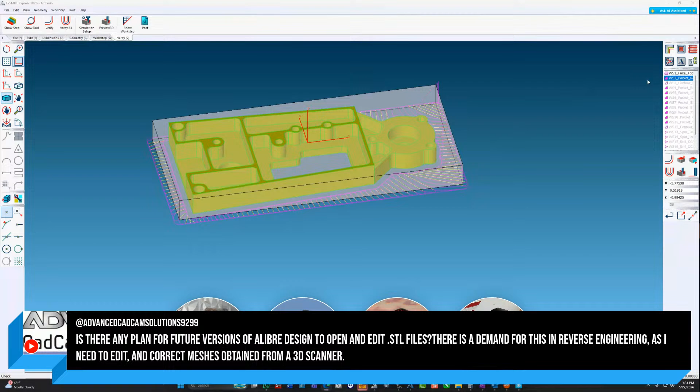Once you're there, if you switch over to my screen for a minute. Let's say this part ran perfect. This is what I want for life. So here I have a 1/2-inch cutter.

Let's just change this to 20. Let's make some changes just to show that there are some changes being made - finish allowance on a pocket, maybe even a step. Okay, so I've changed those couple of things.

Is that like a hot pocket? Well, a taco. Or a taco.

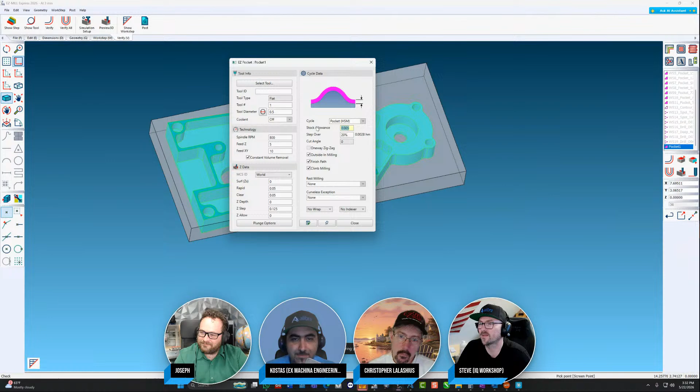Let's see, I just want to see. Okay, so that was cutting the outside of the part. Now I want to use that same strategy, that same tool, and go in and pick my Sweet Pocket, select an area, my step over, my finish allowance, step down. Everything is being used just as it works with that setup, that part.

I'm going to throw other parts on there. They might have different features, but I'm not trying to finagle with the speeds and feeds that come from here. These are all your standard - came out of the Machinery's Handbook, came from different carbide resellers. You pick your material, so it's a template. It gives you an idea of what it's going to take for a high speed or a carbide.

We all have to start somewhere, but once we get where we want to be, you're going to want to start using templates. Love it. That's going to be invaluable. Thank you. Yeah, for sure.

This is probably a pretty good follow-up - is there a metric tool library available? Yes, there is. Let's see, so if I were to switch over, let me see if I got a metric part just to... So, yep, tool diameter 15. That cannot be inches. No, 15-inch drill. Yeah, you can do the same thing. We have inch and metric tools, templates.

Yeah, it's a molding machine, isn't it? A mold cutter. Or a tunnel boring machine or something. A little tunnel boring machine, like. There you go.

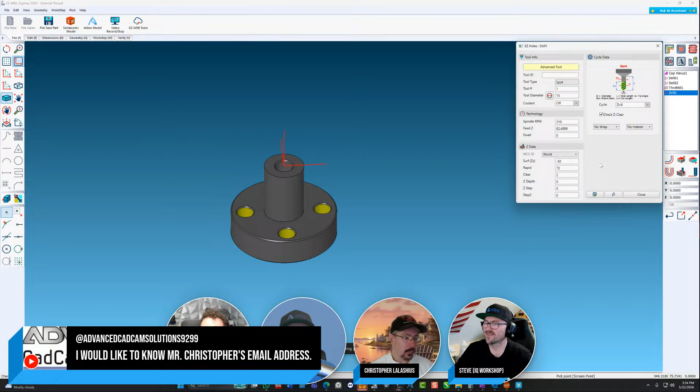If you're wondering who that pretty face is - face only a mother could love. I thought I was the pretty face of the stream. No. Well, I thought we were... all pretty. Bet the hat. Hey, come on guys. I've had quite a few compliments lately - I've been told I got a face for radio and a voice for print. So your reply to that is, so you're saying I have a chance. You're saying I'm good, we've got the skills for live stream. There you go.